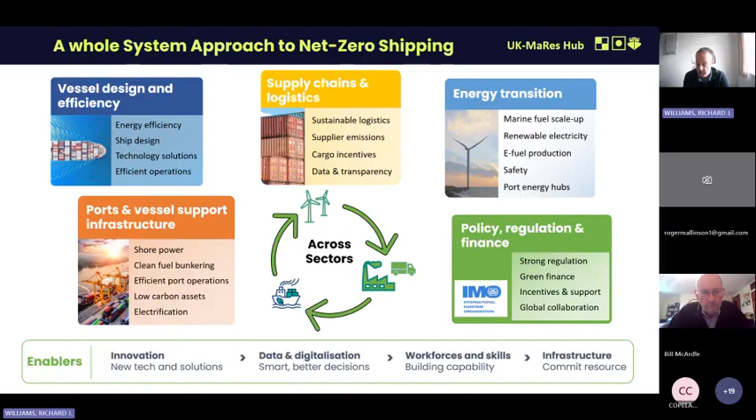So the enablers of net zero really are innovation, both in the technical solutions, data and digitalization, a workforce and skills piece to do as well, and infrastructure and committing to those assets for the future.

So why efficiency first? So this is one pathway to decarbonisation of the maritime sector. So very much looking at efficiency first. So maximising efficiency and reducing energy demand today through operational, technical, digital and electrification, and also putting in place that support structure and the market and regulatory structure for achieving net zero by 2050. So that's really what we're doing now in the next sort of 10 years.

In midterm, so looking at 2030 to 2040, this is really where we're looking at fuel scale up, and fuels are biofuels, e-fuels, LNG, and e-LNG, green methanol, green ammonia, green hydrogen, and also carbon capture and storage. All of these will have a role to play, but need large infrastructure expansion, large bunkering availability, and also engine readiness for the vessels of the future.

And in the 2040 to 2050 time frame, we're looking really at a full fleet transformation, bearing in mind that vessels have a 25 to 30-year lifespan, so the decisions we make now will affect what is still around in 2050. We're aiming for a full net zero ecosystem, which is mature, largely based on zero carbon fuels.

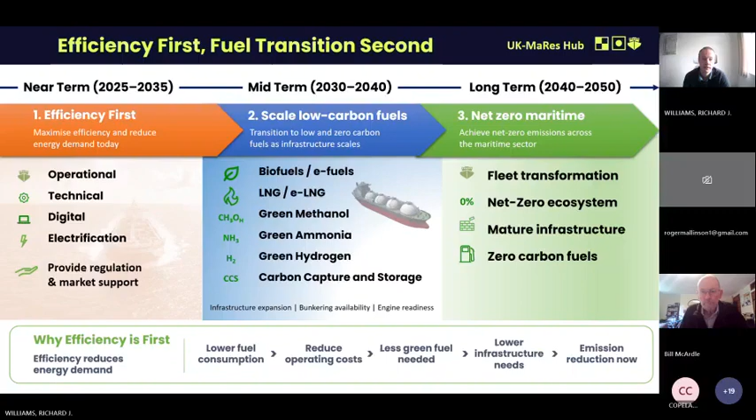And it's just worth saying that these requirements will tighten over time. So they're starting off quite soft, but they will ramp up quite quickly. So by 2030, 2040, the shipping industry really needs to catch up.

Just have a bit of a closer look at some of those regulations. So the International Maritime Organization sets the global regulatory framework for reducing greenhouse gas emissions from international shipping. So these are large-scale vessels, gross tonnage of 400 tons and above, which would typically be like bulk carriers, tankers, container ships, gas carriers, those sorts of vessels. Smaller inland vessels or coastal vessels tend to be handled by the country themselves.

If you look at new ships, there's a thing called the Energy Efficiency Design Index. So this is the minimum requirement for new vessels. This is really encouraging new propulsion and new designs to be implemented in new vessels.

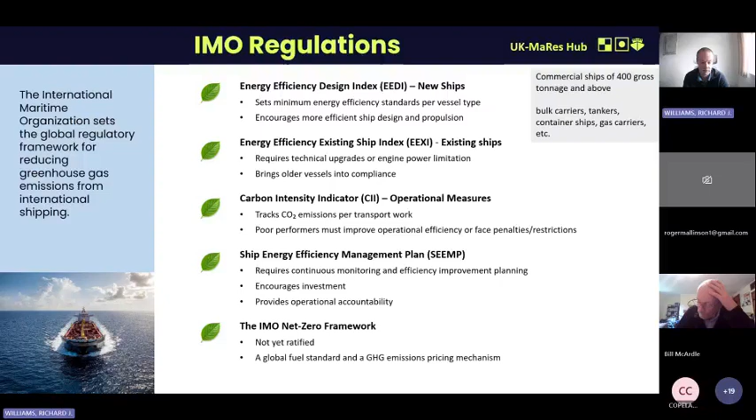And then the final one on here was the IMO Net Zero Framework. It's not yet ratified, but it's a global fuel standard and a GHG emission pricing mechanism that the IMO would like to roll out around the world for improving the uptake of new fuels. It's important to say that that's on a well-to-wake type basis, so it's a full life cycle assessment of the emission of those fuels, not just the tank to the wake.

In the EU, there's a thing called the Fit for 55 climate package, which is targeting 55% emission reduction by 2030. And within that is the EU ETS, which came into effect in 2024, and it puts carbon pricing on ship emissions and creates a direct financial incentive to reduce fuel usage and switch to low emission options.

There's FuelEU Maritime, which is promoting cleaner fuel, and that's from January 2025. And that requires progressive reductions in fuel intensity. So again, that's on a well-to-wake basis, and it's also requiring shore power. So while vessels are in port, in the EU, they'll need to be able to plug in in the future.

In the UK, the domestic maritime emissions will be included in the UK emissions trading scheme as of July this year. And the UK and EU are working towards linking their emission trading schemes together. So that will be in the future.

So as I've already said, our decarbonisation options really in the long term are alternative fuels. So these are things like hydrogen, ammonia, methanol and biofuels, but they require significant scale up. Some of the other challenges include the lower volumetric density of the fuels, so larger space requirements on board vessels. They tend to have lower technology readiness levels at the moment, and they have unfamiliar sector safety implications. So the implications of putting things like methanol or hydrogen on board a vessel are not yet fully understood.

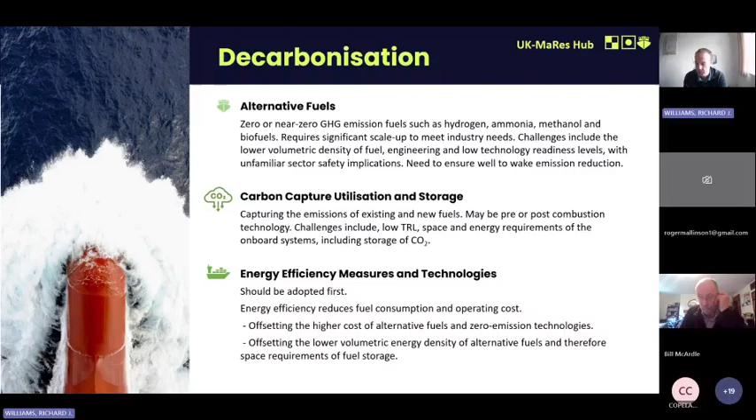And then finally, our energy efficiency measures. So these should be adopted first, as they reduce fuel consumption and the operating cost.

So really the background to my presentation today is that back in 2024, we were asked by DFT, the Department for Transport, to write a report assessing the evidence for energy efficiency measures in maritime. It ended up being a very long report of 95 pages where we gave an overview of the regulations, maritime decarbonisation and the relevant abatement measures of greenhouse gases.

So it was a systematic review of each energy efficiency measure in turn, where we gave an explanation of the measure, estimated the reduction potential and the technology readiness of those measures, and what sort of vessel they would be applicable to, so whether they're applicable to a small vessel, a large vessel, etc. So that report is publicly available, and if you can't find it online, I'm sure we can help you find it if you're interested.

So if we look at the options of energy efficiency that we can obtain, they change whether you're looking at an older ship or a new ship or an operational measure. So if we're looking at new ships, we may choose to alter the vessel propulsion and power, or add waste heat recovery, or look at the ship hull design. These are measures that are quite expensive to implement or retrofit onto existing ships.

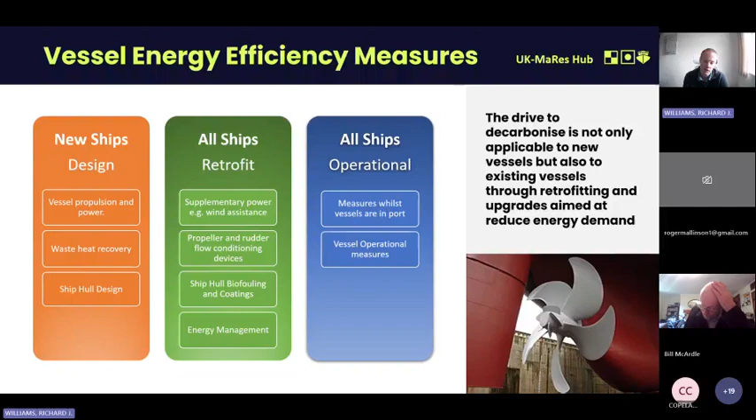So the incentives there are for implementing energy efficiency measures. They can be fuel cost savings, so reducing the fuel consumption and lowering our operating cost. There may be regulatory compliance, like I've just talked about. There may be port incentives, so there may be discounts for energy efficiency or low emissions vessels, such as reduced port fees. There may be market competitiveness, so charterers may prefer ships with strong CII performance, which could improve the charter appeal of your vessel.

There may be emissions trading benefits, so lower your penalty exposure for your reduced emissions and reduce your carbon costs. Or there might be corporate reputation, so demonstrate commitment to sustainability and enhance the public image of your company.

There are quite a few barriers to implementing energy efficiency, though. So as we've already said, vessels have long lifespans, so 25 to 30 years, which typically can delay your fleet transition. Some of these technologies are not very mature. There are many low carbon solutions, but they're not yet commercially scalable, which limits the large scale deployment. There may be operational safety concerns. New systems must meet strict safety and reliability standards for insurance purposes, which can increase the hesitation of ship owners when they're choosing their new vessels.

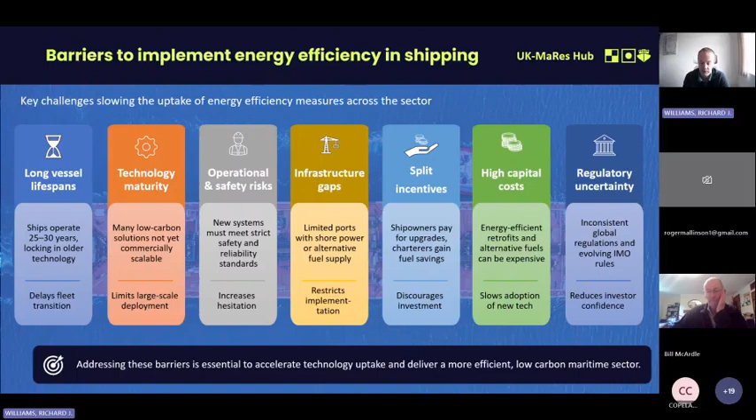There may be infrastructure gaps, so limited ports with shore power or alternative fuel supplies. Very few ports currently have things like hydrogen in place, which would restrict your implementation. There may be split incentives between the owner and the operator. These efficiency measures can have very high capital costs, which can basically mean there's no business case. And there can be regulatory uncertainty as well, so inconsistent global regulations and evolving IMO changes. So that can reduce your investor confidence for releasing cash for implementation.

When we did our survey and we looked for evidence of the emission reduction potential of these technologies, we looked at lots of different literature sources. So these are brochures, academic papers, online resources, classification societies. Quite often grey literature, as there's not a huge amount of peer-reviewed papers of these measures actually on board vessels.

The data is often commercially sensitive, especially when a service or technology is being sold by a company, and it requires deep understanding of the application and the particular ship. There may be no mechanism to share any data in a meaningful way for each of those technologies. So we really had to rely on several sources and assess the quality of the data of each of those sources.

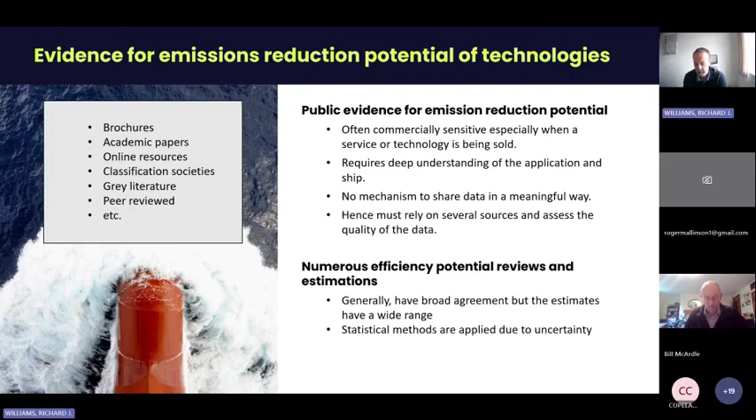It's worth saying there are numerous energy efficiency potential reviews around. They generally have broad agreement but the estimates have a wide range, and often rely on statistical methods to assess the quality, really aiming for a median rather than a minimum or maximum energy efficiency saving.

A couple of sources here. On the left-hand side is an image from the World Bank report. This is a recent report from last year where they looked at each of the energy efficiency saving technologies and tried to estimate their emissions abatement. If you look at the plot, this is an emissions abatement curve. The things in green generally don't cost very much to implement, but you can have a significant CO2 saving from implementing those. So they're the ones you should probably always do.

On the right hand side, they can save you a large amount of CO2, but they maybe cost too much to implement. Things like waste heat recovery, there may not be a business case for retrofitting that onto an existing vessel. So that's one way of looking at it. That was a very detailed report by the World Bank.

There are also some technology trackers. On the right-hand side is the DNV Energy report. Every year they update this report, looking at each of the technologies and the maturity of those technologies.

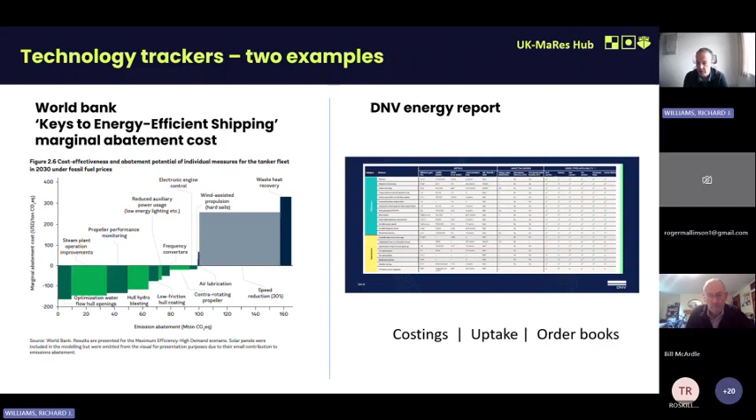In academic papers, there's two examples here. On the left, from 2017, they use a box and whisker type plot to look at all of the available literature sources at the time and listed all of the different measures. So speed optimization can go anywhere from close to 0% saving all the way up to, say, an 80% saving. So there's a large spread of data.

The one on the right-hand side is a very recent report, done by the Hub, and in here they included fuels as well. There's a lot more data than back in 2017, and it's a much more detailed report. What you can see is that the fuels have a really high CO2 emission reduction potential. But again, there's a really large spread, anything from very small reduction potential up to almost 100% reduction potential by, say, implementing methanol.

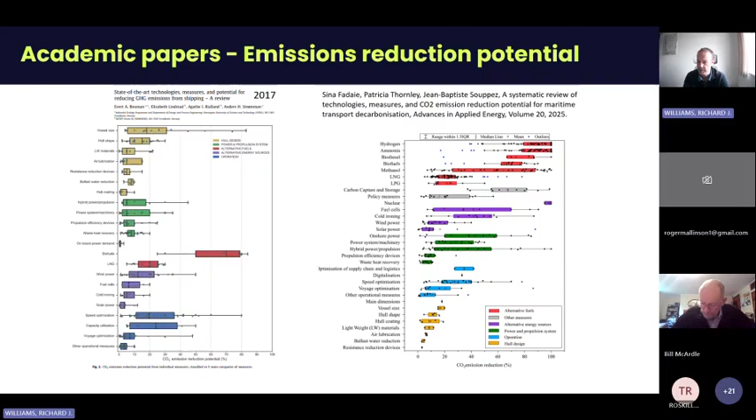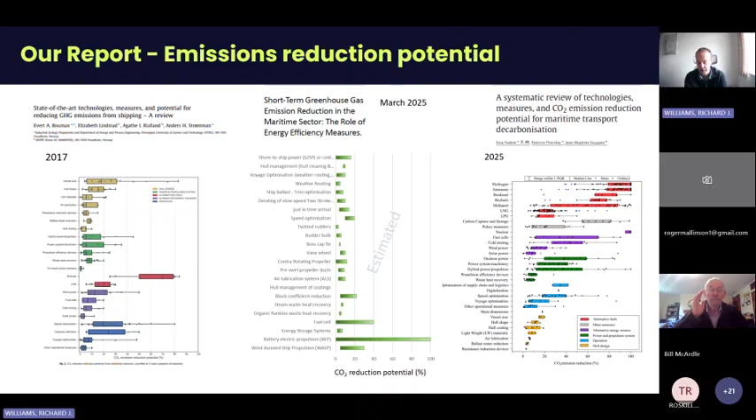So they really rely on applying statistical methods, in this case a box and whisker plot, to show what could be achieved by implementing each method. From my report, I did a very similar plot, but I didn't do the statistics. The one in the middle is my version of those, and they're quite similar really in what can be implemented, the highest efficiency saving technologies and the lowest.

It's worth dwelling a little on how we would estimate efficiency improvement potential, which can explain quite a lot of the spread in that data. If we want to estimate the efficiency, we could look at modeling, using some simulation-based prediction of energy savings, but this can rely on a lot of guesswork, and the error can be quite high.

We could do some laboratory testing, say like tow tank testing or things like that - these tend to be very controlled testing environments of individual technologies in isolation - or we could do the higher cost field trials, implementing these on real vessels and trying to estimate the efficiency improvement on a real vessel.

It's worth saying that external factors change. No two voyages are the same. Wind conditions change, so it makes it quite hard to really estimate what the efficiency improvement was. You really need to have it on board for a significant period of time to estimate that improvement.

It's also worth looking at how to choose a baseline for the improvement potential. If you choose a poor baseline with a really low efficiency vessel and implement your device onto it, you can over predict the efficiency gain across a fleet. Whereas if you choose a state-of-the-art vessel as your base case, you could under predict the potential improvements at a fleet level. So you really need to understand the details when looking at the sources.

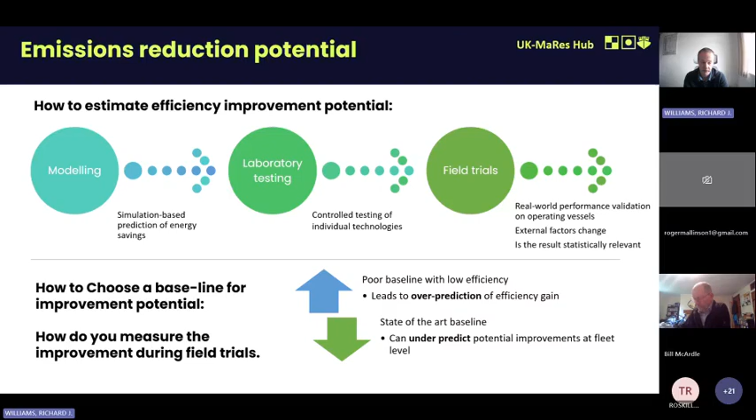Energy efficiency measures combined are also compounded and not additive. So if you put all of the energy efficiency measures that you have onto one vessel, it won't add up to your 10% plus 10% plus 10%. It will be somewhere you get diminishing returns from implementing those new technologies. So there's quite a fine balance, and it really requires in-depth engineering knowledge and design to predict your overall energy efficiency, or what you will end up with on your vessel.

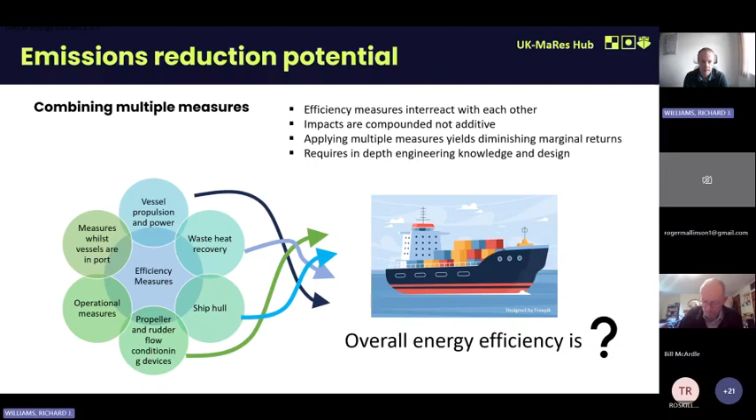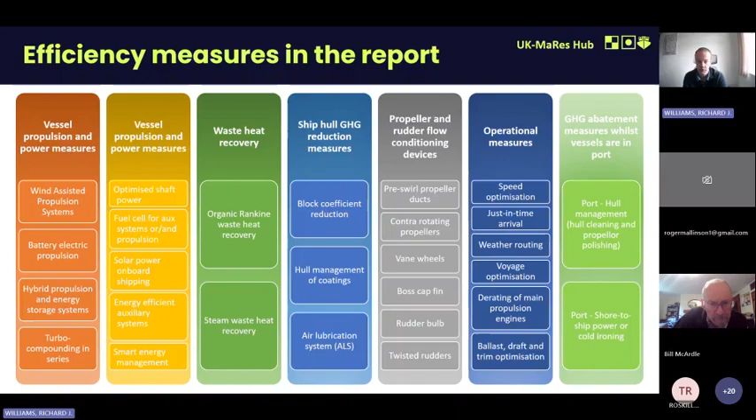This slide shows all of the measures that we included in the report. There are sub-measures under each of these. I'll not go through them in detail, but generally you group them into vessel propulsion and power measures, waste heat recovery measures, ship hull reduction measures, propeller and flow conditioning devices, operational measures, and measures while in port. Those were the overall groupings. I'll now go through some of those in a little more detail.

If we look at propulsion systems, we could apply turbo compounding systems, applying energy recovery in the exhaust. You're converting that waste heat, similar to a turbocharger in a car, to boost fuel efficiency. These weren't standard 20, 30 years ago, but they are probably more standard now on modern vessels.

Hybrid propulsion systems, again similar to a car, mean you may choose to run your vessel in electric mode, engine mode, or a hybrid mode in between, depending on the voyage you're taking part in. Looking at order books, not all new vessels are hybrid propulsion systems, but they are becoming much more common.

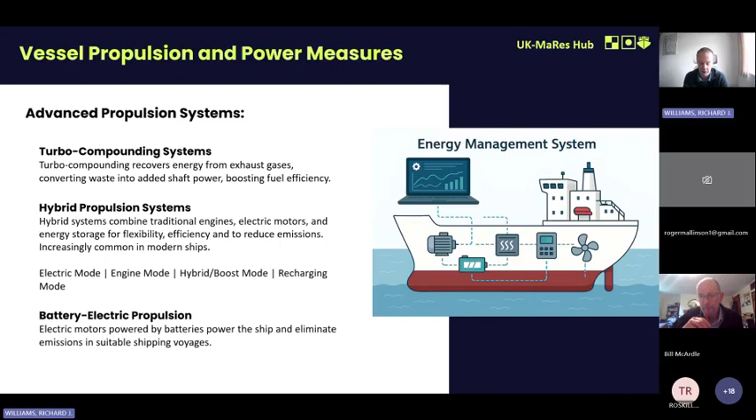Finally, you may choose to have a fully battery electric propulsion system on board, but again that's really for short duration shipping, not long duration sea shipping. So ferries and those sorts of vessels may be able to switch to fully electric propulsion.

There can be further advanced energy systems, such as using fuel cells - hydrogen or methanol-based fuel cells - for powering your auxiliary systems, for example, or propulsion in some cases. They can provide zero-emission energy solutions on board your vessel.

You may be able to implement solar energy on your ship. If you have large deck space that isn't being used for something else, you could put solar cells there and power your auxiliary loads from those cells rather than from your main engine.

Smart energy management - you can upgrade your smart systems to optimize those systems, similar to a building, say. And you may choose to implement low energy devices.

Things like LED lighting - 20 years ago, that wasn't normal on a vessel. Today it is, but you could choose to retrofit older vessels with LED lighting and significantly lower your energy usage. Similarly, with variable frequency drives for motor controllers, or for air conditioning and heating, you may choose to install heat pumps, for example.

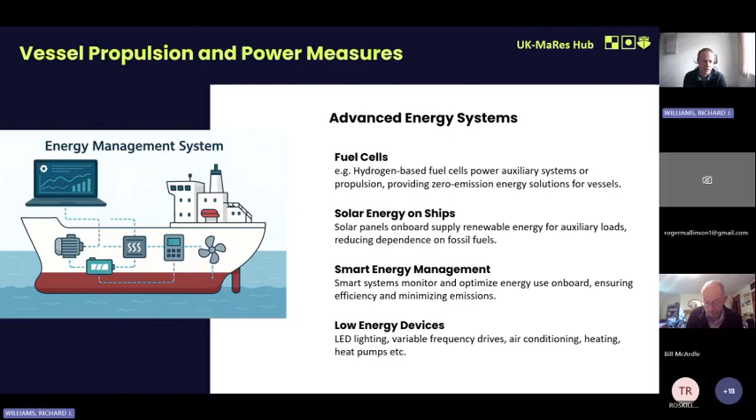Wind-assisted propulsion is one of the big ones, and can have significant savings in the industry. I've seen up to around 20% efficiency savings from this alone. Wind-powered devices reduce fuel use by supplementing the engine power, so you can run your engine at a lower power if you deploy these devices. The fuel saving is very dependent on the voyage profile itself - where you're sailing in the world, what the weather conditions are like, the sea state, the wind speed, and obviously the direction you're sailing in.

So the challenges are wind variability and weather routing - really predicting what the weather is going to do, so you can sail a voyage that maximizes the use of those devices. It needs integrating with the ship design, so for a new ship that's a bit easier, but retrofitting it onto an existing ship will likely need a lot of steel, a lot of shoring up of that vessel, which requires large upfront installation costs. There's maybe not really the incentives in the marketplace at the moment to do so. The vessels with it at the moment tend to be first movers, I suppose.

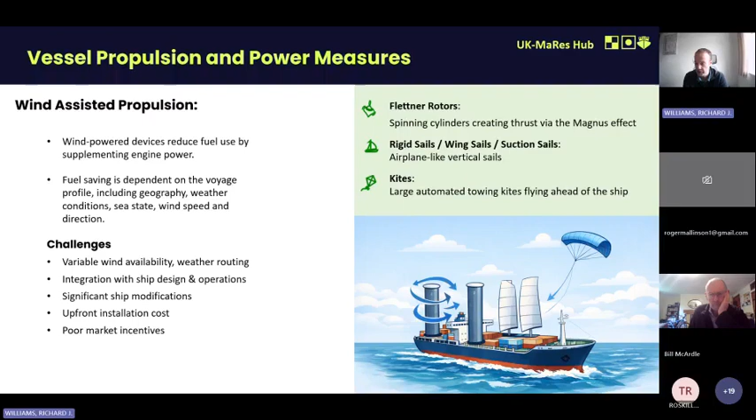There are a number of technologies, things like Flettner rotors, which are spinning cylinders, meaning the wind direction doesn't matter so much; rigid sails, wing sails, suction sails, which are like aeroplane-like vertical sails, a bit like sailing vessels. A lot of these require additional power supplies, which can be quite significant, especially with the Flettner rotors. And then the final one is kites - kites that can sail above the front of the vessel and drag your vessel along with a tailwind.

Moving on to waste heat recovery. Energy is usually wasted through heat - this is really looking at the main engine. If we recover that normally wasted heat to generate useful power, it increases the overall efficiency of the vessel. We may look at the engine exhaust or the engine cooling water, two of the big sources of heat. Some of that heat is at low temperature and some is at high temperature.

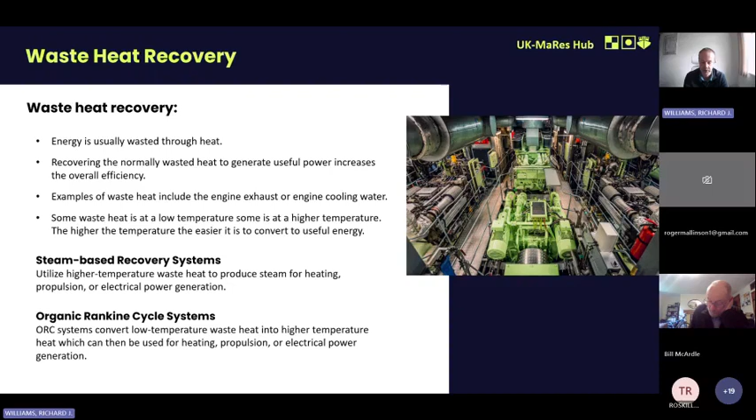At a higher temperature, you would probably use a steam-based recovery system, and at a lower temperature you may choose to use an organic Rankine cycle system. But in both of those systems, you would convert that power into electricity, and you could use that electricity for hotel loads or propulsive power.

Moving on to the hull design, optimizing the shape of the hull has a direct impact on the resistance or drag of the ship moving through the water. If we reduce the block coefficient, it lowers the water resistance and improves propulsion efficiency. The block coefficient is a way people look at the shape of the ship, and on the top left is the equation for that.

Basically, the more streamlined your vessel is, the lower the drag. It's worth noting that with hull designs, now that we have modern processing tools, we can do multi-objective optimization, taking into account lots of different things to really optimize that design for higher efficiency and

lower fuel usage. Moving on to air lubrication systems: this is where bubbles are injected beneath the hull to reduce the skin friction between the hull and the water. Again, it needs power to run the compressors, and there are installation and maintenance costs. These can be implemented on existing vessels or new vessels, and they tend to be used on vessels that move relatively fast,

like cruise liners that are implementing them. So air lubrication is implemented on quite a few vessels today.

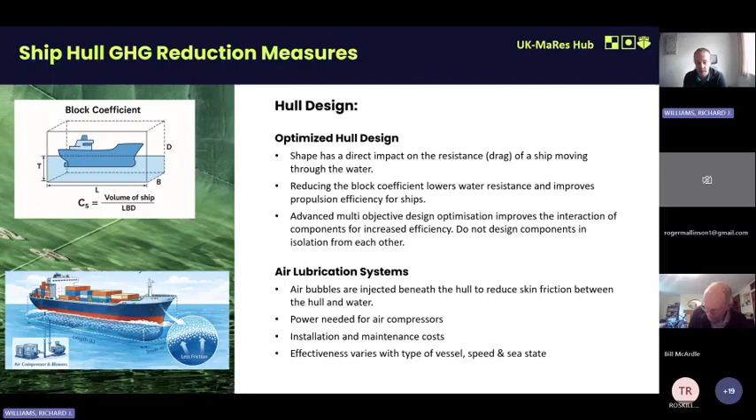Moving on to hull coatings and anti-fouling. Biofouling below the waterline increases hydrodynamic resistance, driving up fuel consumption and emissions. Basically, barnacles or other organisms stick to the hull, which increases the amount of fuel used when passing through the water.

It really depends on the operational profile of the vessel. If you spend a lot of time in port, you will have higher fouling than if you spend lots of time at open water.

Effective coatings maintain hull efficiency, reducing operating costs and environmental impact. There are a number of different coatings in use today. Biocidal coatings leach a biocidal agent into the water, killing the fouling organisms as they attach to the vessel. There are issues with their effect on the wider maritime environment, so there are regulations around their use. There may also be fouling release coatings, which have low friction, making it really difficult for marine organisms to attach to the surface.

And then finally, there may be hard coatings. These don't really inhibit marine growth, but instead allow for regular cleaning of the vessel. So your choice of coating will very much depend on the type of vessel and where you're operating in the world.

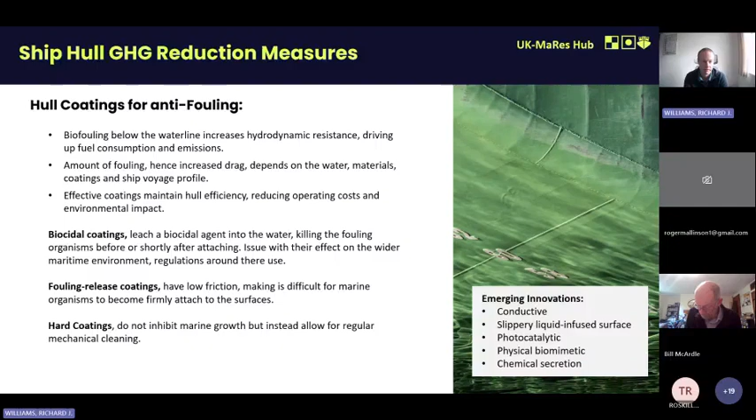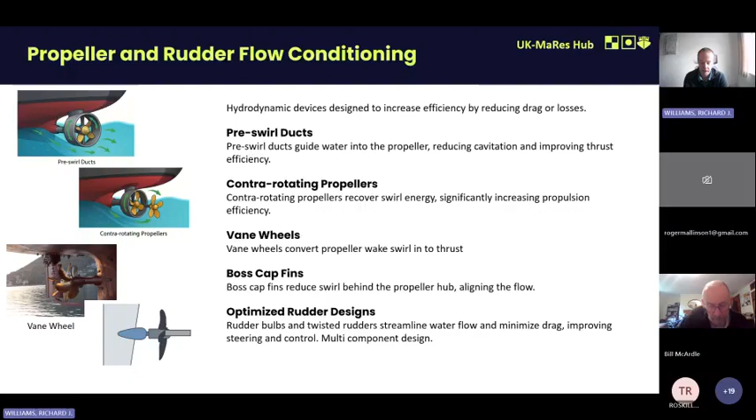There's lots of traditional work around the propeller and rudder, things like pre-swirl ducts, contra-rotating propellers, vane wheels, boss cap fins, and optimized rudder designs. None of these are particularly new ideas, but they just haven't really found widespread use in the industry. They are certainly commercially available and readily available.

Moving on to operational measures: things like ballast, draft and trim optimization. This is how the vessel sits in the water, which can have a significant impact on the drag of your vessel and its efficiency.

You may choose to undertake speed optimization, using efficient speed profiles to reduce fuel by matching vessel speed to the engine load, operating your engine at a much higher efficiency point, depending on the environmental conditions. Overall, if you reduce the speed of the vessel, you reduce the power required to push it through the water.

Weather routing: using real-time weather data, vessels can avoid adverse conditions. Maybe you can sail downwind or similar, lowering your propulsion demands and increasing your efficiency.

And finally, just-in-time arrivals: minimizing wait times at anchor outside the port by sailing at a slower speed. The issue here is that the ship and the port need to be in communication to know exactly when the berth will be available for the incoming vessel, and obviously the ship doesn't want to miss that berthing time either. So there are quite large complexities about just-in-time arrival, including contractual agreements, planning and data sharing across the industry.

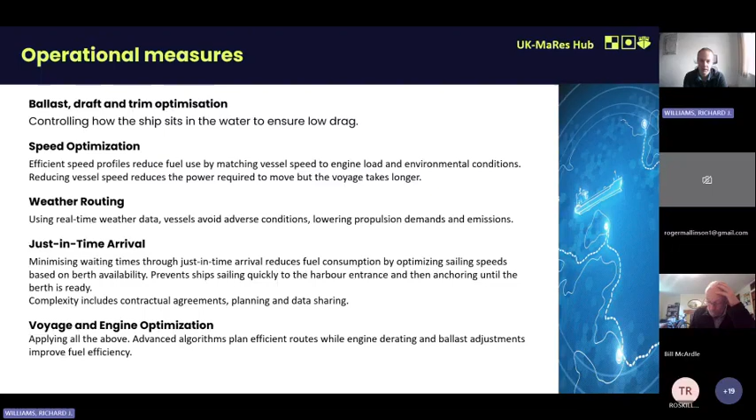The reason, certainly in the UK, why lots of vessels aren't plugging in at the moment is the power requirements and upgrades required to power those vessels, and the infrastructure costs of putting in those cables as well.

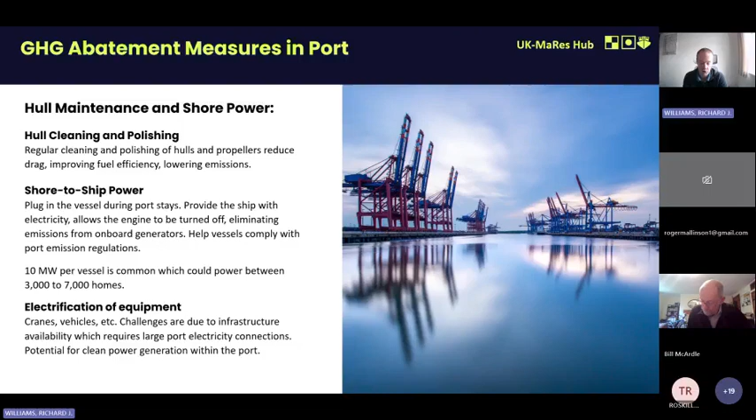Then there's the electrification of equipment in port, so all the cranes and vehicles need to be electrified. The challenges here are due to the infrastructure availability of the electricity connection. There's also potential for clean power generation within the port, where a port can't upgrade their electricity supply, they can look to generate clean power on site, from a generator, or say a small nuclear reactor, or renewable energy like wind or solar.

As I said before, there are incentives to implement these energy efficiency measures in shipping, including fuel and cost savings, regulatory compliance, port incentives, market competitiveness, emissions trading, government support, or corporate reputation.

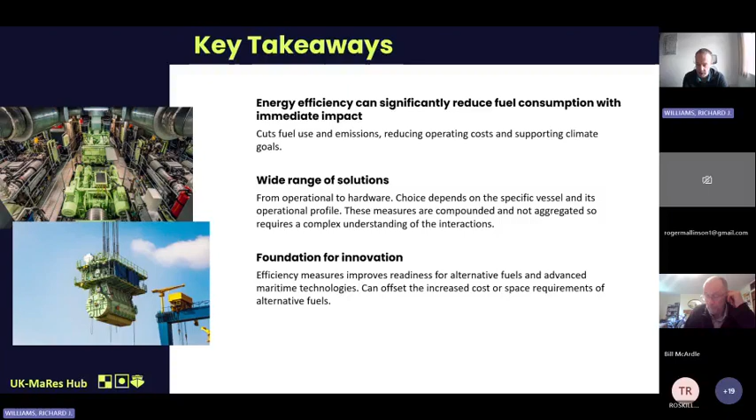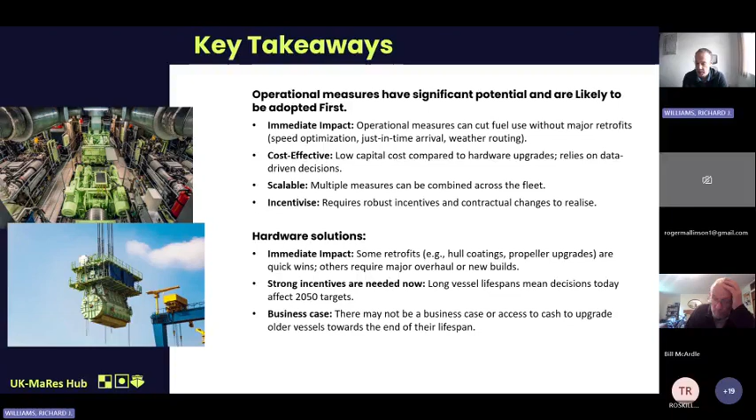Hardware solutions can have immediate impact as well. Some retrofits, like hull coatings and propeller upgrades, are quick wins, but others require major overhauls or new builds. Strong incentives are needed now, since long vessel lifespans mean decisions today affect 2050 targets, but there may not be a business case or access to cash to upgrade older vessels towards the end of their lifespan.

Energy efficiency for regulatory compliance: implementing energy efficiency helps meet regulatory requirements, such as those of the IMO and other agencies, ensuring compliance to avoid penalties, which is tightening over time. A lot of these efficiency measures can be included in the energy efficiency management plan.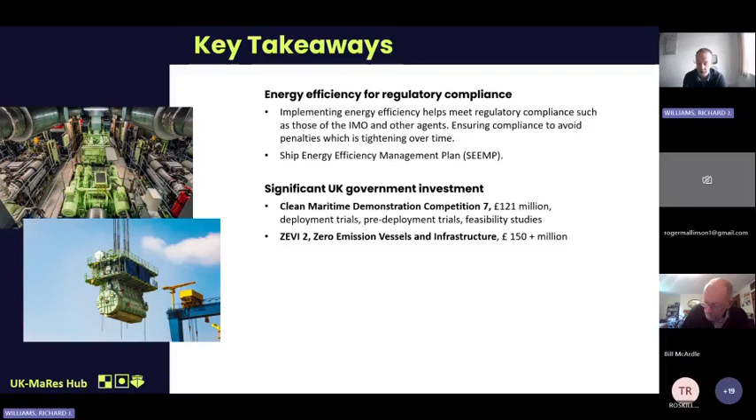It's worth saying that the UK government is investing significantly in this area, so there are two calls open at the moment. There's the Clean Maritime Demonstration Competition Round 7, which is £121 million for deployment trials, pre-deployment trials, or feasibility studies. And there's ZEVI2 as well, zero emission vessels and infrastructure, which is £150 million plus. Those are the two calls currently open.

When I gave this presentation originally to DFT, I was asked to provide some policy suggestions, and I decided I would keep them in here as well, as they might be of interest to this audience.

A way we could improve the uptake of efficiency measures could be to provide installation incentives beyond fuel savings, ensuring technologies are clearly credited in carbon reporting, with crediting linked to verified savings.

We could incentivize hardware retrofits, especially for first movers, promoting energy efficiency technologies through grants or tax relief for retrofitting existing vessels. We could also incentivize green freight contracts with cargo owners, supporting contracts that share fuel-saving benefits between owners and charterers, because split incentives are a major barrier to efficient investment.

We could incentivize operational measures, so encouraging speed optimization, weather routing, and just-in-time arrival through regulatory frameworks, financial incentives, or green corridors. These require minimal capital investment and can deliver quick emissions reductions. It requires tackling contractual norms such as due dispatch, which is what makes it quite challenging.

We could promote the installation and the energy requirements of shore power, so expand port infrastructure for shore-to-ship power to reduce emissions during berthing, and this requires significant investment in grid connection upgrades or local port power generation. We can provide data transparency and market pull, so require ships to publicly report fuels and efficiency data when calling at UK ports. Cargo owners could then prefer efficient ships and pay green freight premiums.